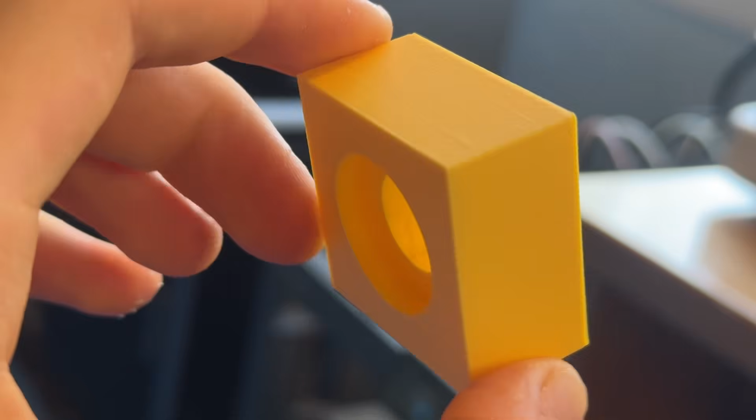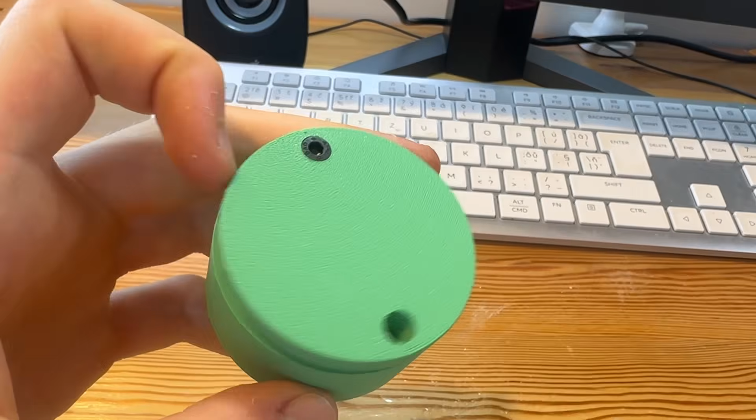If your 3D printed holes are ugly and stringy, you are not alone, because when I was starting out, I found it so annoying that any hole that I designed, for example my counterbore holes for mounting, where I needed to insert the screws into it, the print quality would be so bad because of the stringing and the inaccuracy of the hole that I was wasting so much filament.

And because of that, I would today like to show you how to fix it, not only inside of your designing software, where you truly have the design in your hands so you can fully customize it to your case, but then even a slicer trick that can help you quite a lot. So let's not beat around the bush and let's get straight into it.

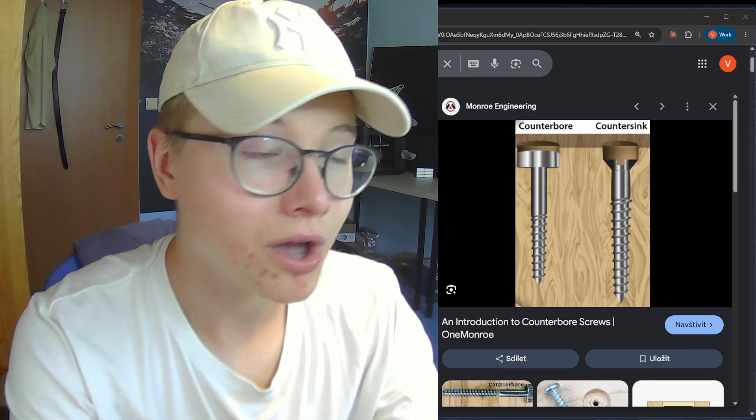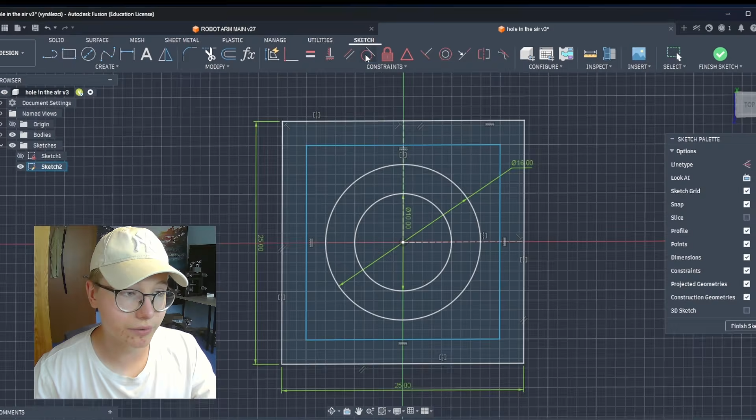So once you are inside of your designing software in the sketch where you have sketched the circles for the holes, I will call them inner circle and outer circle so that I can explain it a bit better. You will go in the create section and sketch out a rectangle. So take the rectangle and just place it randomly in there, then go in the constraint menu, pick the tangent constraint and start constraining this rectangle to the circle itself. And what it creates in the end, as you can see right over here, is a square.

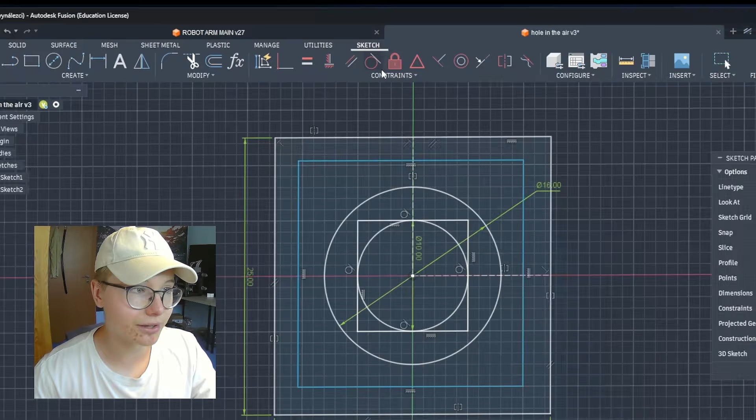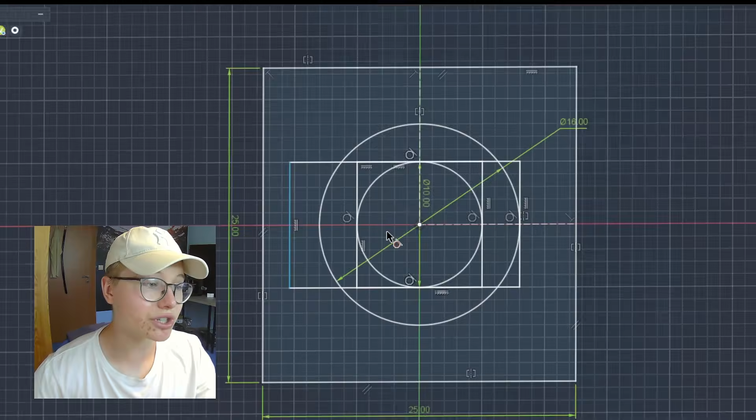Now this is the first one that we need, and the second one that we need is again a rectangle. So just start sketching a rectangle and then again go in the constraint menu, and now we will need the first two sides, which is this side and then the side beneath it on the bottom, to be tangent again to the same circle, but not the second one. So first make these two tangent to the exact same circle, but now these two side ones, we need them to be tangent to this circle right over here. So just make them tangent there on both sides, and this is all we need from sketching.

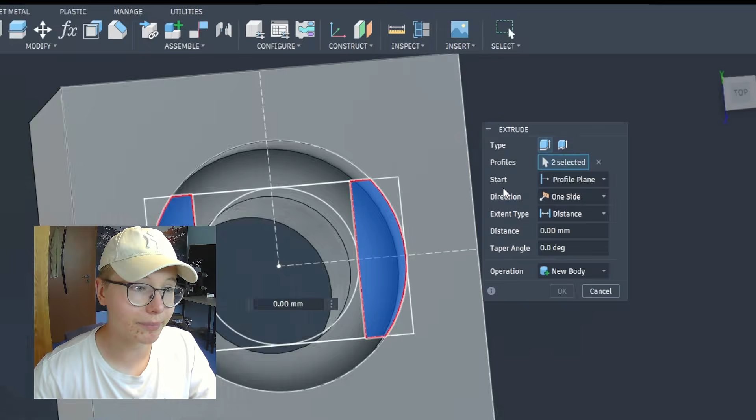So once you have that, you can finish the sketch, reveal the sketch, and now we will start extruding. The first two profiles that we need to extrude are this one right over here, and the second one that is exactly the same, just symmetrically on the other side. Then in the extrude menu, you will pick start from an object. Once you pick that, you can select the ring of the hole that is inside. Once you select it, you are starting to extrude from that point on, and then you can start extruding.

And now this extrusion is really important because what you want to extrude is one layer height. So this really depends on what you are printing and what you are printing with. If you are printing, for example, with 0.2 millimeters of layer height, you will extrude over here minus 0.2, but you can always make this a bit bigger, because it will give you a bit better results, but it will not be that dimensionally accurate and the geometry will be a bit different.

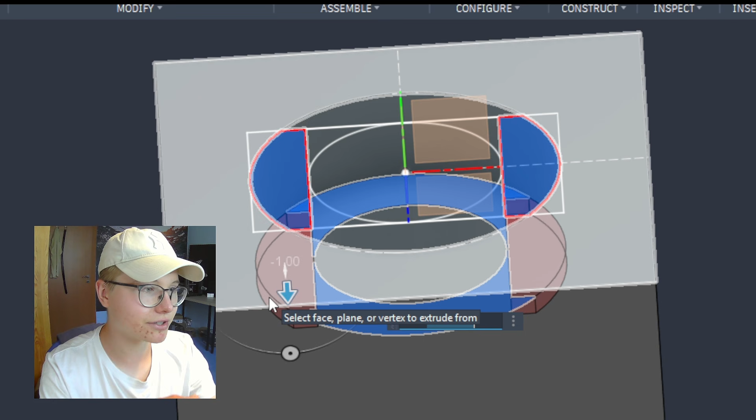So for the most accurate results, pick minus 0.2 millimeters if you are printing with 0.2 millimeters. And if you want a bit better results, just extrude a bit more. For example, minus 0.4, so that there are two layer heights that the printer can bridge against. So that's exactly what I will do. So minus 0.4, and this way I cut out two layer heights that I will be then printing with.

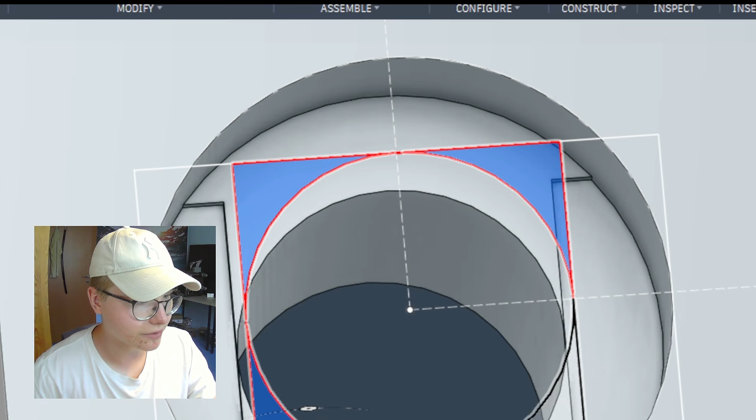So once you have this, you can start doing another extrude, and you will pick these four corners of the square that we made before, and again in the extrude menu, you will pick start from an object. Once you pick that, you again select the ring. So you select the exact same starting point, and now instead of extruding two layer heights, you need to extrude double. So whatever you extruded before, you will now extrude double. So for me, that's minus 0.8.

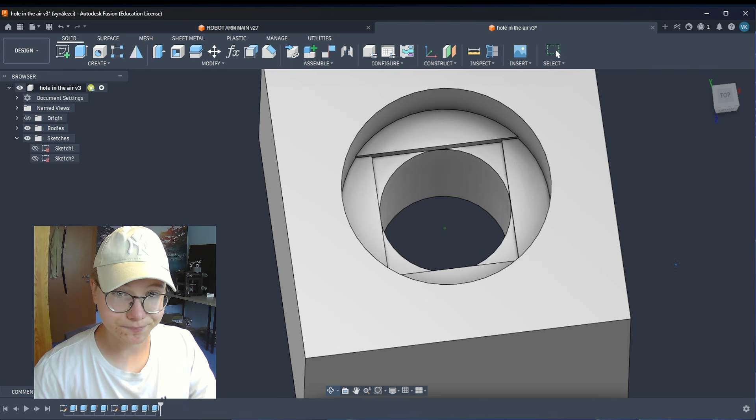I will export it and show it to you inside of the slicer. And so once you import it inside of your slicer, as you can see from the bottom, the geometry is a bit different, and that's exactly what we want. So let me slice it, and once I slice it, it actually looks completely different.

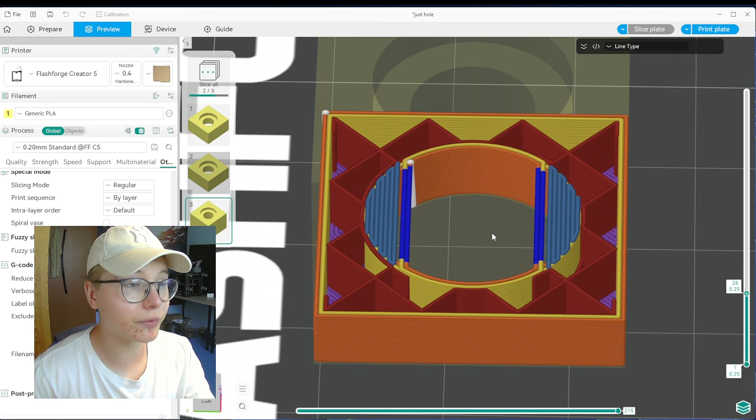And what it does right now, instead of trying to print in the air, as you can see, the first time it does any geometry of the hole, it creates just two bridges that are from one side to another. So it never does the part where it would print in the air, because all it is doing is bridging from one side to the other, and that's why this thing completely fixes it.

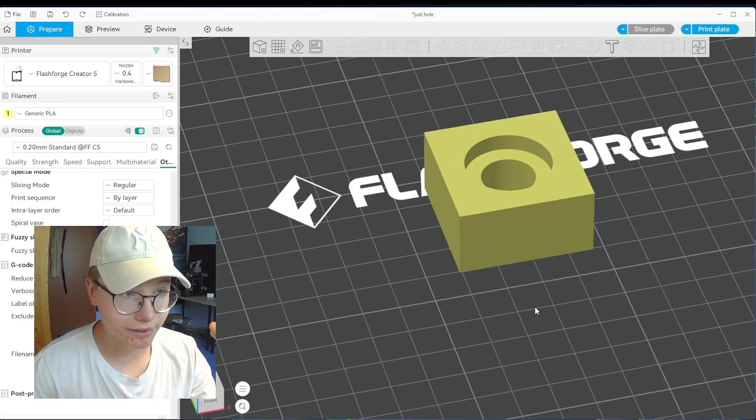But now I would like to show you how you can fix it most of the time inside of your slicer, but you have a bit less control, and that's why I don't prefer it. So as you can see, I have this example right over here that is without any change of the geometry on the bottom. You're gonna click on quality, which is right over here, and then you're gonna scroll down, and you're gonna find the menu called bridging.

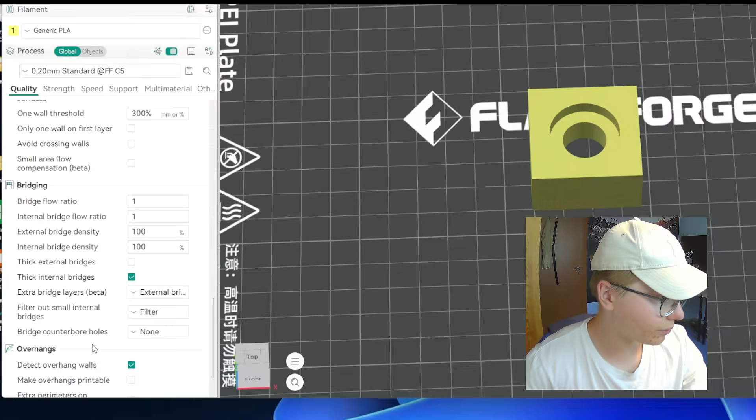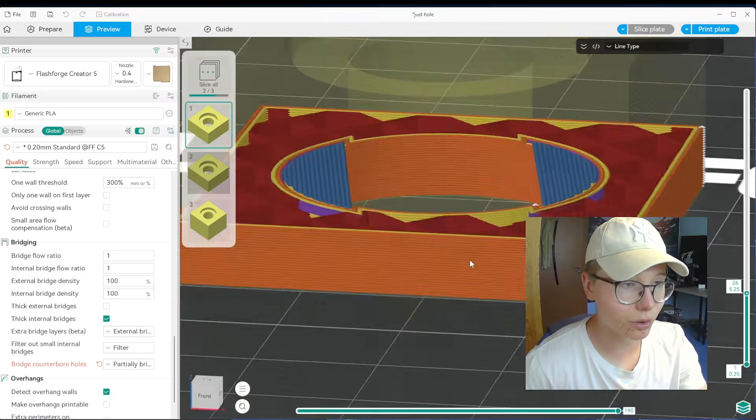So once you find bridging, you will go into Bridge Counterbore Holes, which is exactly what we're doing. There are three options. Either there's none, which means that it doesn't fix anything, or there is another option which is called partially bridged. Now this is exactly what we were attempting to design. And once you slice the plate, first it does exactly this bridge only on the sides as we did, and then it does the second one. And because of this, it fixes it for you so you can do it completely in the slicer.

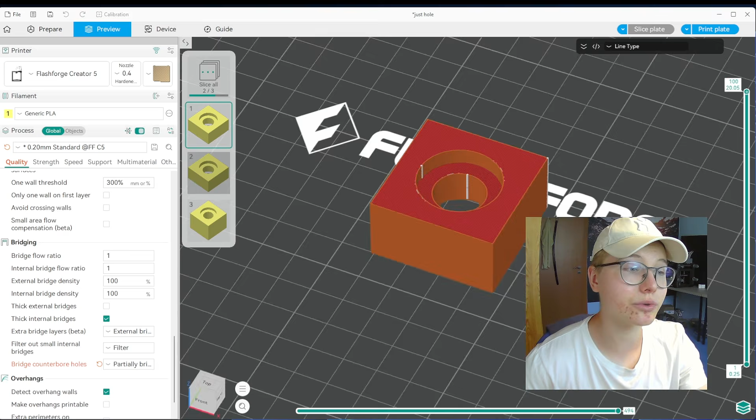But the problem with this is that, for example, if it doesn't print well, it's just a single layer. And that's exactly the advantage you have inside of your designing software that you otherwise wouldn't be able to do inside of the slicer. And then there's a third option. So I believe that partially bridged is really good. For example, if you don't have any CAD knowledge, it's amazing.

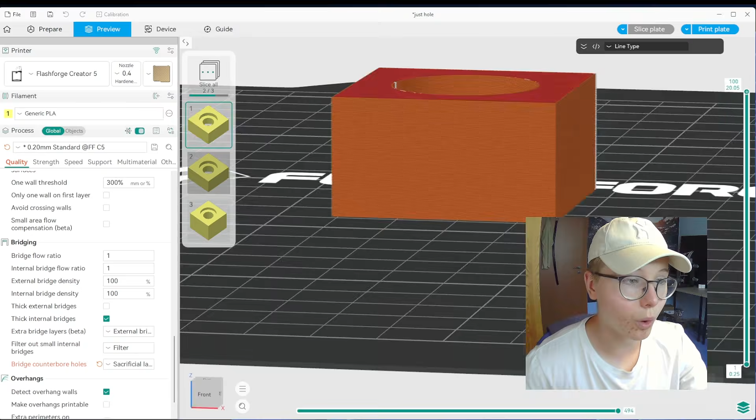But the third option that I want to show you is something called Sacrificial Layer. It seems pretty dramatic, but what it basically does is that you sacrifice exactly one of the layers and it just bridges over the whole layer. I don't find this to be that good because you're trying to have the hole accurate, and now they just put more material in there. So of course this solves it basically completely, but again it is not that accurate, so I don't prefer it.

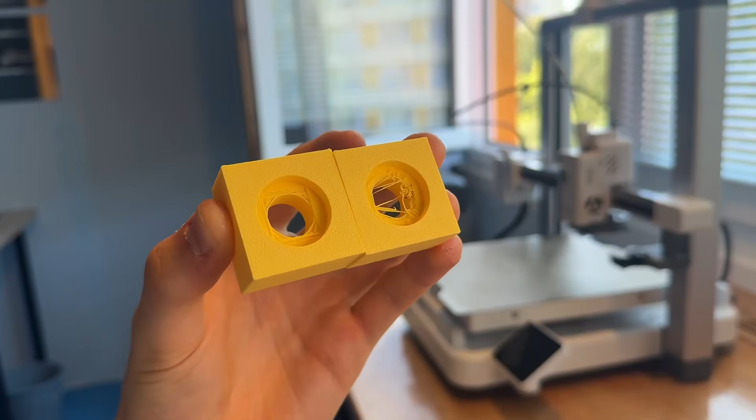So I hope that this video was able to help some of you as well as it helped me.